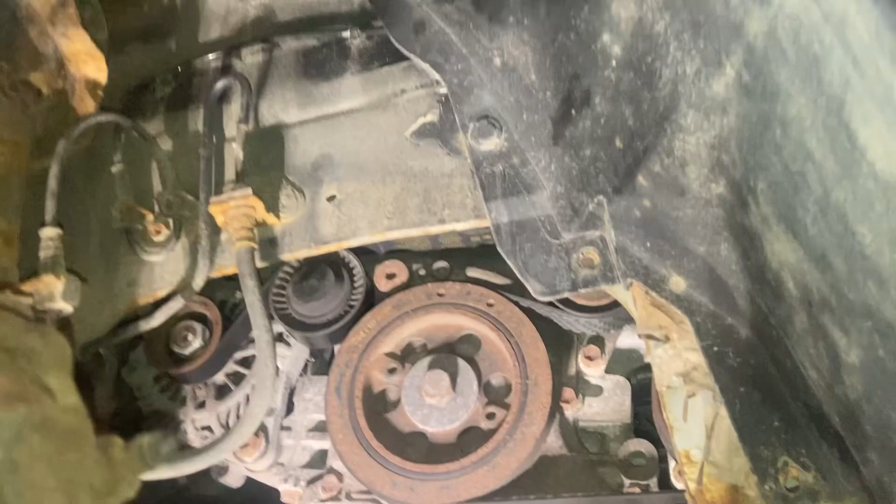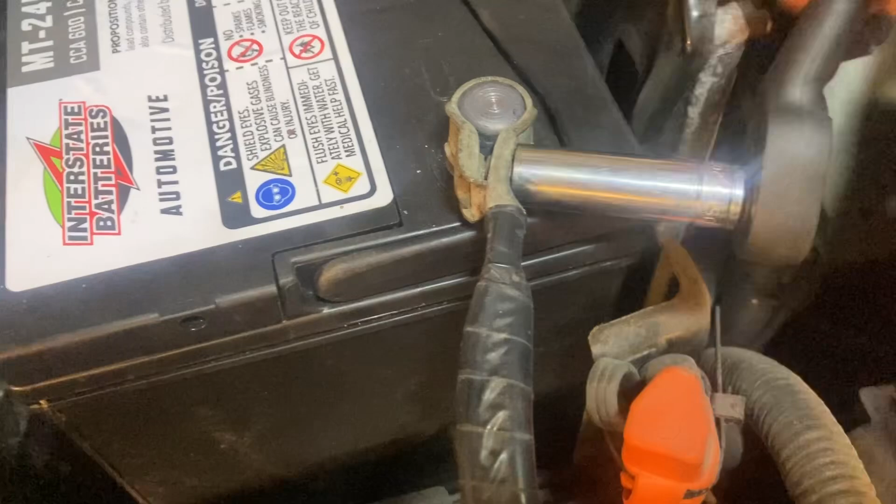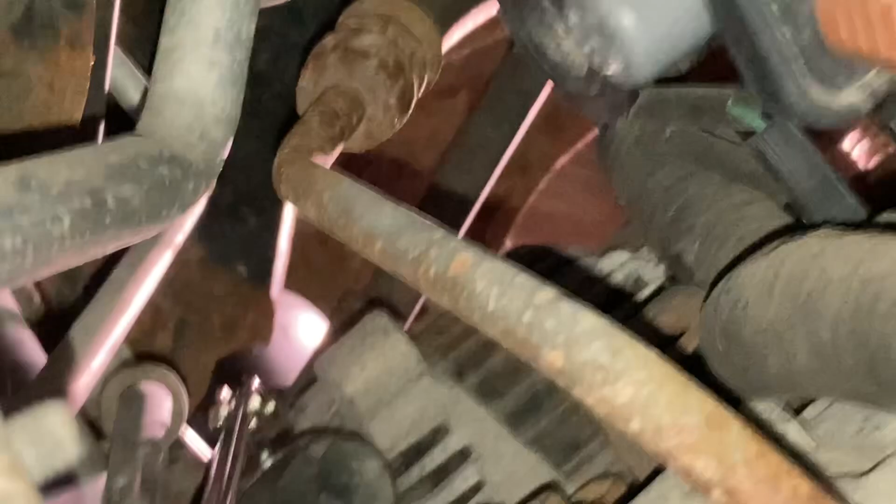I'm just trying to get a look at the mount bolts here, guys, because you can't really see them from the underside. I'm getting a look with my mirror here. I don't like the look of this. I don't know if you can see it too well. You see that bracket there? Let me zoom in a bit.

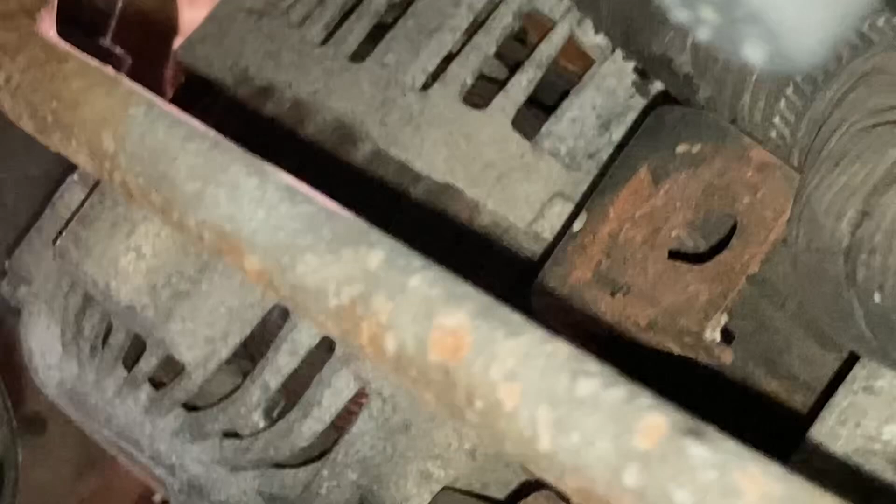Can you see the hole? Can you see how nothing is mounted in it? That's because the harness is pinched. Can you see that? Is that the root cause of the issue here? I doubt it somehow. That's not doing the system any favors, is it?

I mean, you can clearly see there's a tie wrap clamp that's supposed to go there, yeah? You don't need to be a genius to figure out that harness is not in the right position, do you? Oh man, see if I can get you a better shot of this, guys. Better lighting. If that's the kind of workmanship you're going to subject somebody's car to, leave it for somebody else. Not cool.

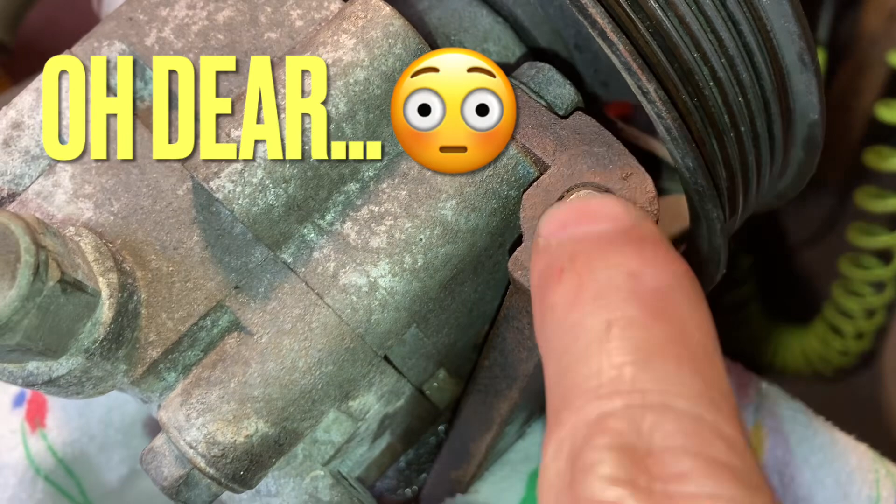God. Yeah, so you can see it's sheared. I've tried to weld a nut. I tried to drill it, but it's a fairly long bolt. I didn't want to drill it all the way through and tap it because I'm not going to be able to run true on the center line of the bolt. So I tried to extract it. I broke the extractor, and now there's a hardened extractor in here, so I'm hooped.

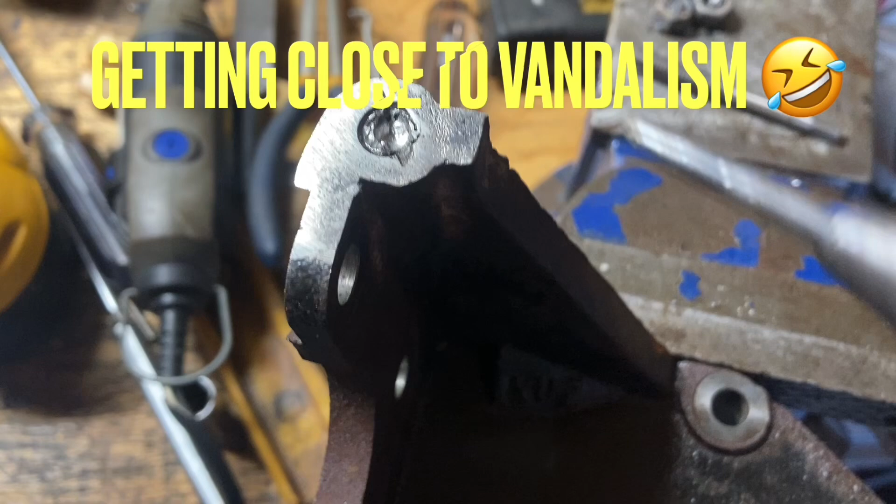I tried to cut a slot in it and use my manual impact, and yeah, as you can see, I was just starting to damage the bracket at that point, at which point I gave up. Fortunately, there's a fella with a machine shop in the neighborhood here, so I'm going to see him.

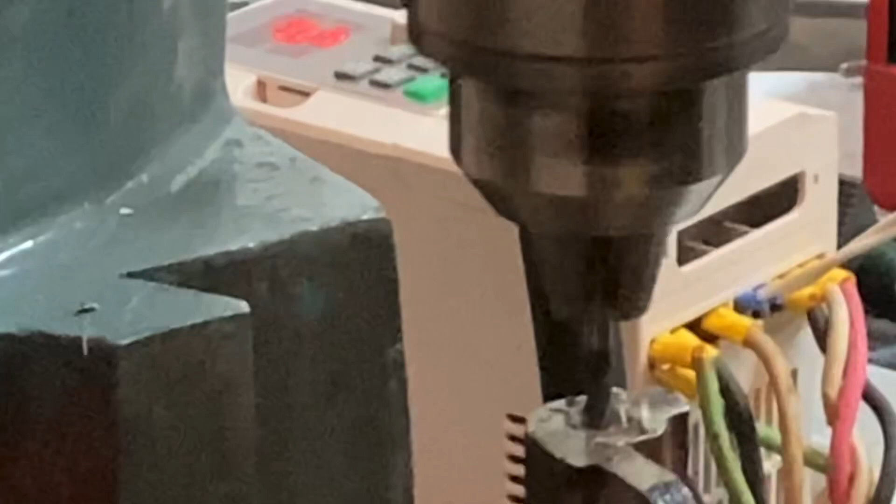The extractor is hardened steel, of course. You're not going to drill that out with regular drill bits. And yeah, so far so good. That is how it's done when you've got the skills and the tools.

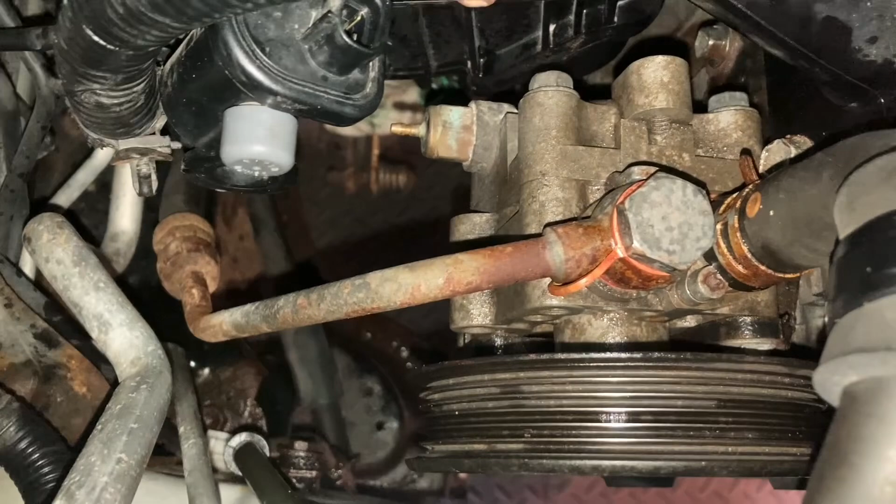Power steering pump is all back in. Yeah, that was a bit of work. I could have done without that aggravation, but what can you do? Nobody's fault but my own, I guess.

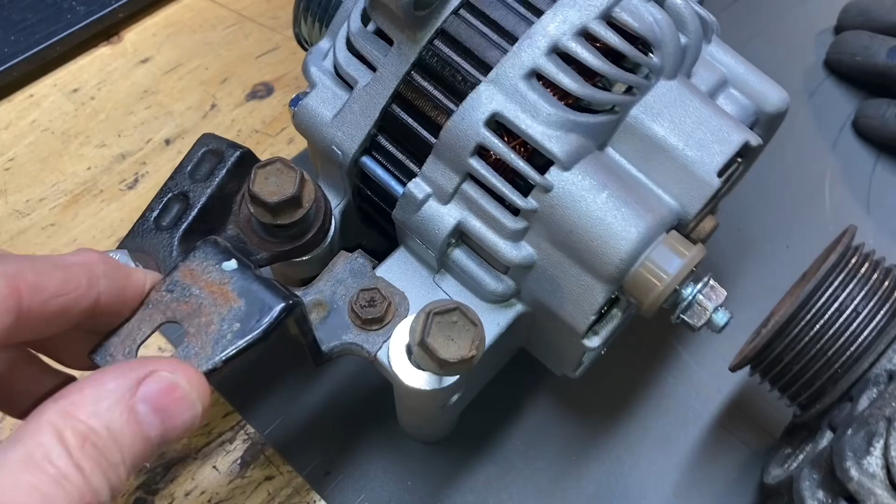So I've got the bracket swapped over. This is just a standoff for the wire loom, guys, of course the tie up to the power steering pump. New bolt.

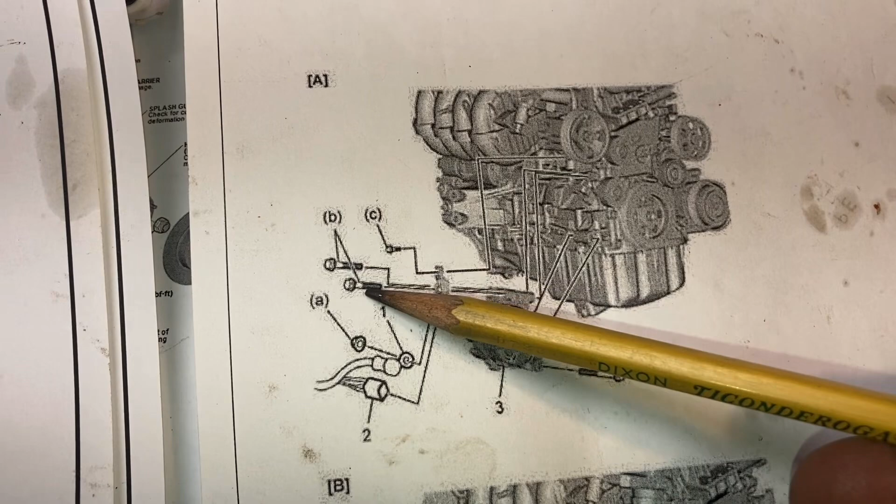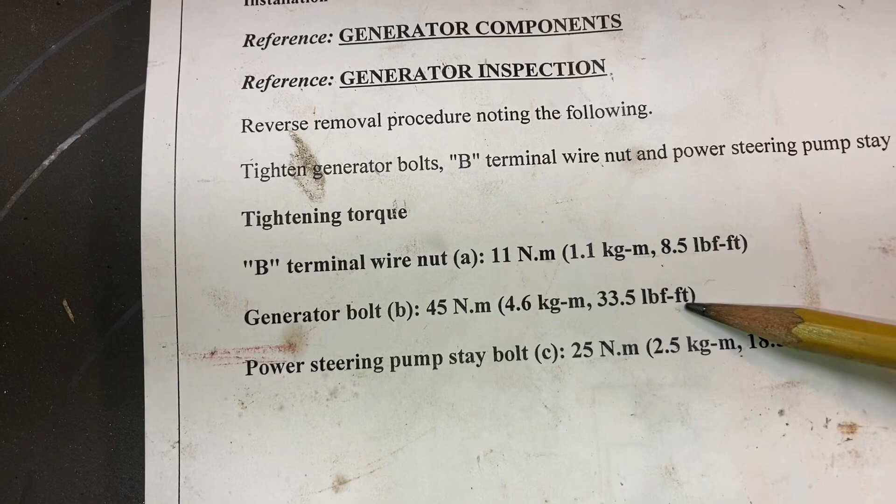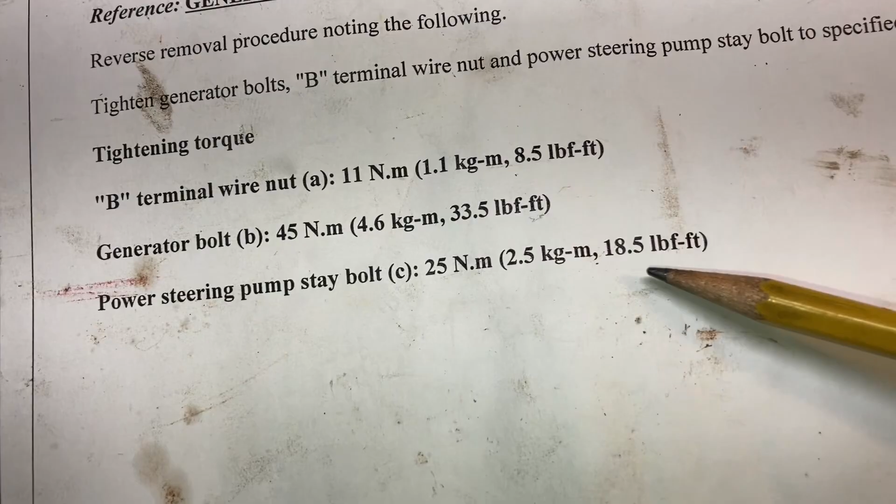So the 3 bolts, the 2 mid-length ones and the long one, torque spec on those, tighten them up to 33 and a half, that'd be 34 foot-pounds to you and me. And the stay bolt here, wee bugger, power steering pump stay bolt is 19 foot-pounds, the smaller one there.

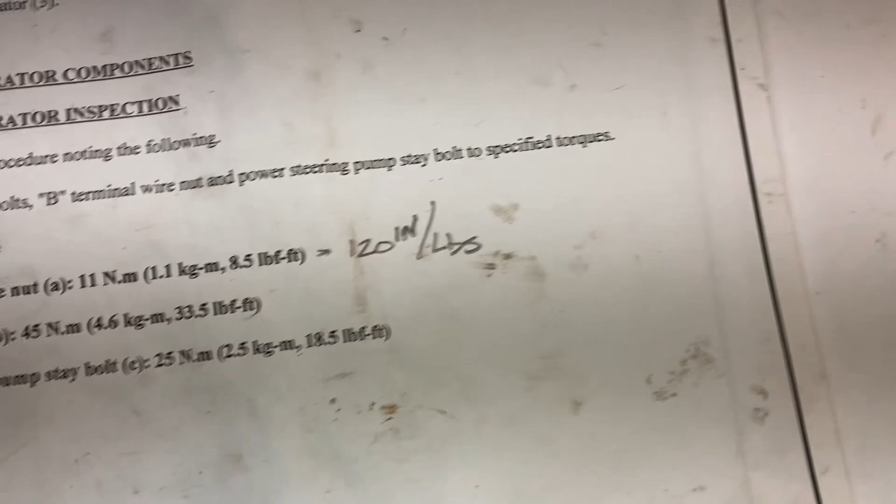Torque the nut on the stud, right? That's spec'd out at 8.5 foot-pounds. I don't know why they would put it in foot-pounds, because there's no way in hell you're going to get a wrench that size in. So go to your smaller torque wrench. That's 120 inch-pounds is what that is equivalent to.

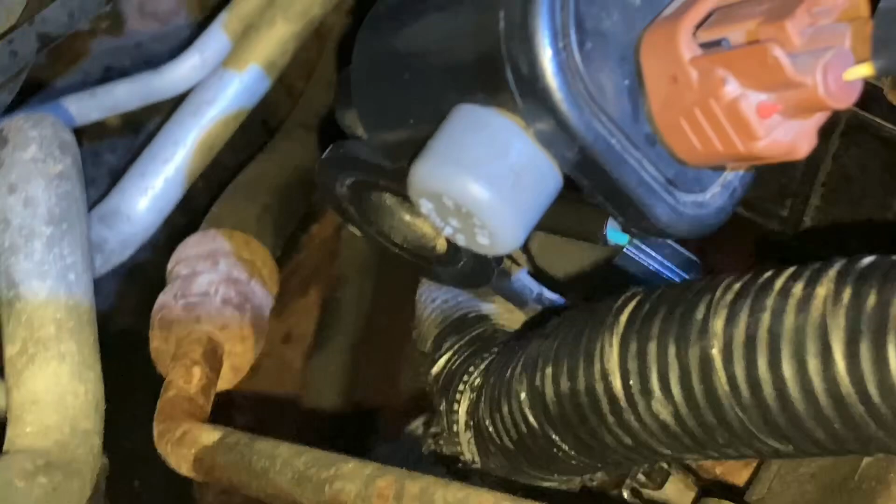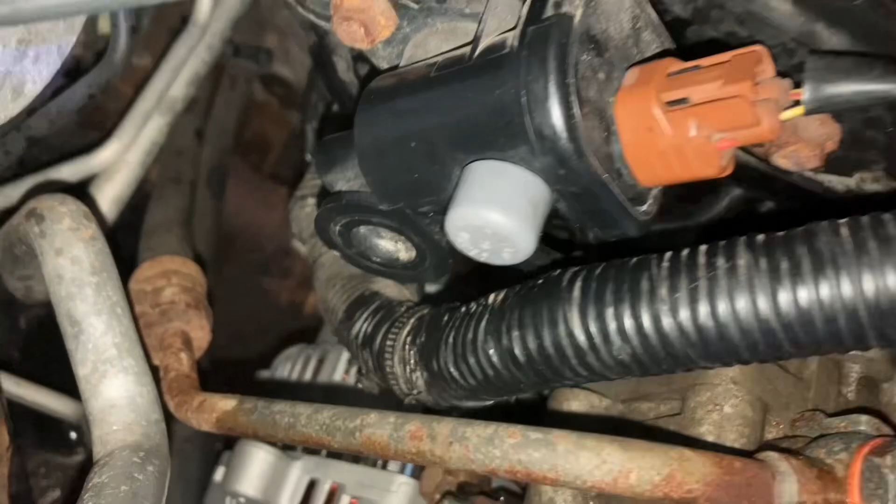Yeah, so the harness is all resecured. It's all in the proper standoffs there, guys. You can see the way it sits off the alternator there, not jammed in between. Yeah, the pressure switch on the power steering pump is back on. Not that you'd be dealing with that in a normal installation, but make sure all the tie wraps and standoffs are all clipped into the correct position. Obviously the lug is on the B post there, and I put the connector on the alternator as well, guys.

I guess I forgot to film that. I'm going to clean these ground lugs. That is the knock sensor, that is a ground lug, and that is a ground lug. I'm going to clean these while I'm here. It wouldn't be a bad idea to remove this, clean it up, guys. Again, we put a dielectric compound on it to keep it from corroding.

That's the body ground, the main body ground, and you see there in the back of the gearbox, that's actually the engine main ground. I've removed that and cleaned that as well. You can actually access it through the wheel well. It's right there.

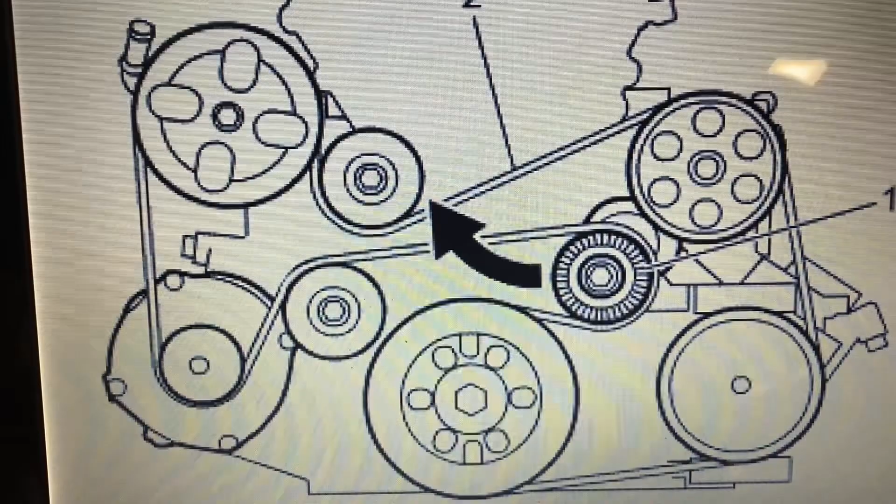Here's a look at the belt routing, guys, if you forgot how it goes, which is easily done. This is again for the J24B engine. The earlier pre-2010, 2009 and earlier SX4s have a J20A engine. This is only for the J24B, 2010 and later, 2.4-liter gasoline.

So I have plenty of work on this thing still, guys, as you can see. The drive shaft is now back in. In fact, the ball joint is just sitting there. It's not bolted. The pinch bolt is not attached.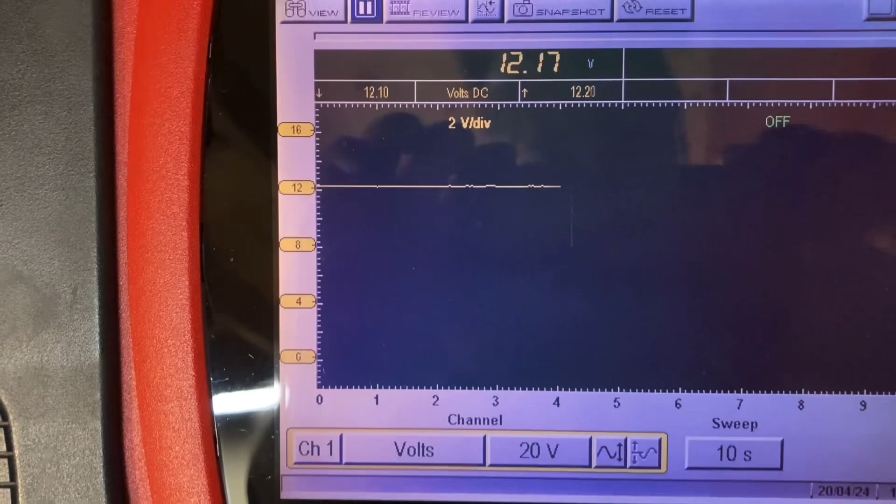Sorry about the rumble here, guys. This heat shield here is loose. Obviously, I've got 1,000,001 jobs I need to sort. That's very annoying, that noise.

Okay, so that voltage looks good. Voltage looks good there. If you remember, the trouble spot was around 2,500 RPM. Okay, so go to 2,500 RPM, Lisa.

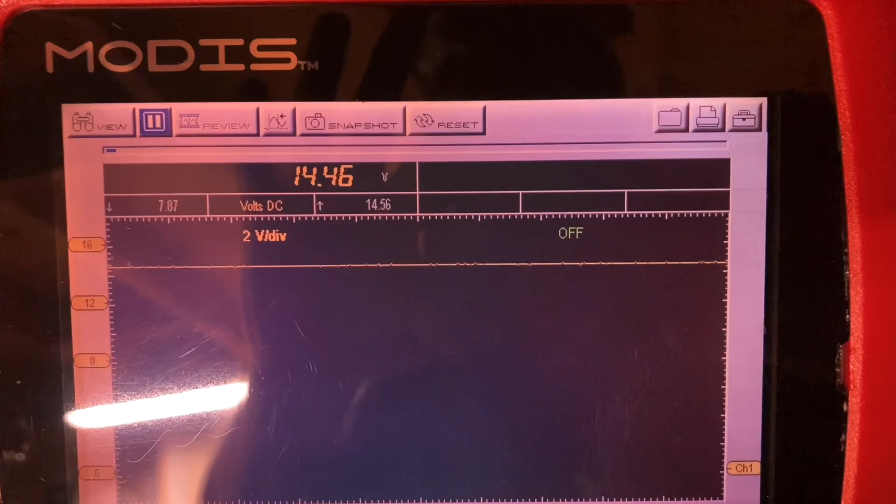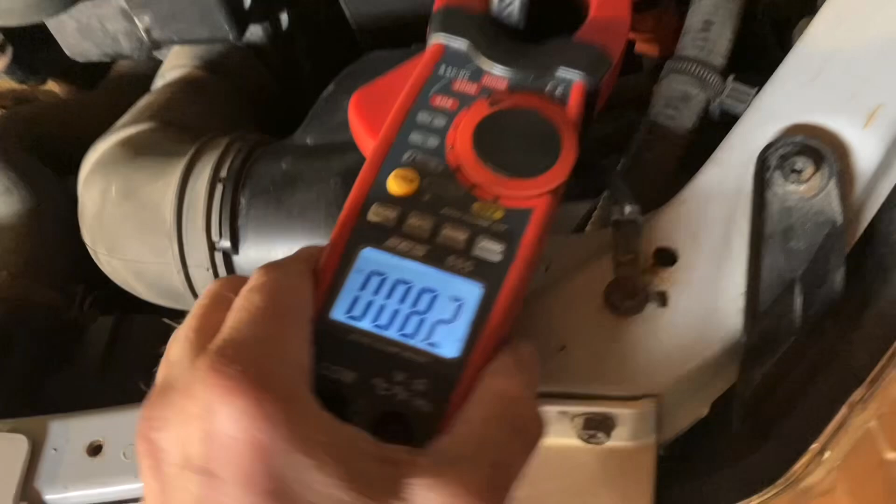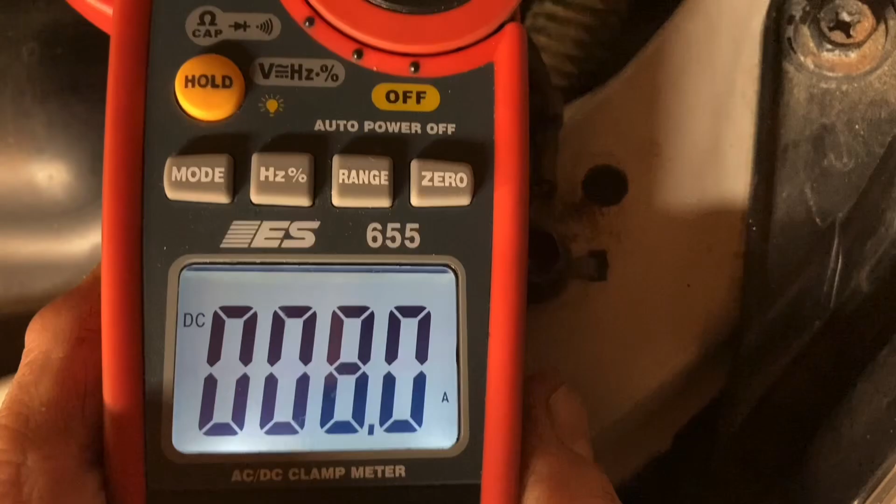Good. Back to idle. So the battery is charging at idle here. That's amps. At about 8 amps. And we're just sitting around here at about 14.4. That looks about perfect to me.

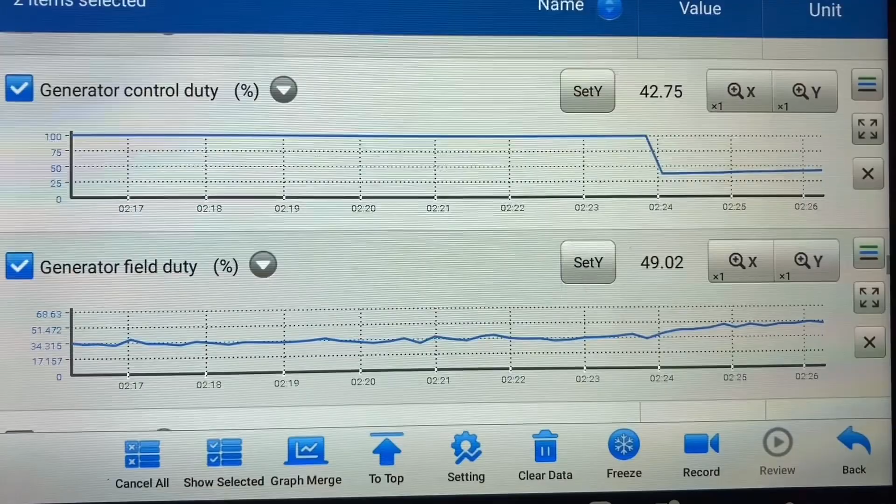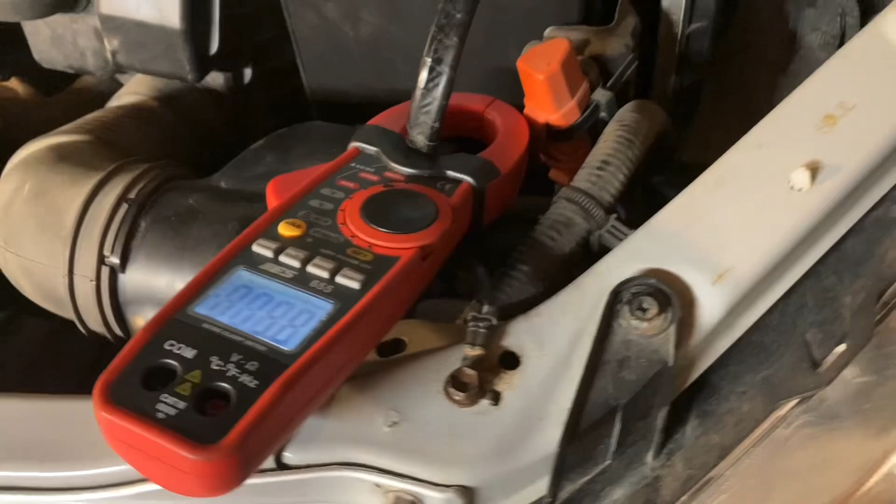I guess we'll call it good at that, guys. I'm pretty happy with this. I think everything is cool. I didn't see any scary 17-volt output for the alternator under any circumstance there, including the trouble spot RPM.

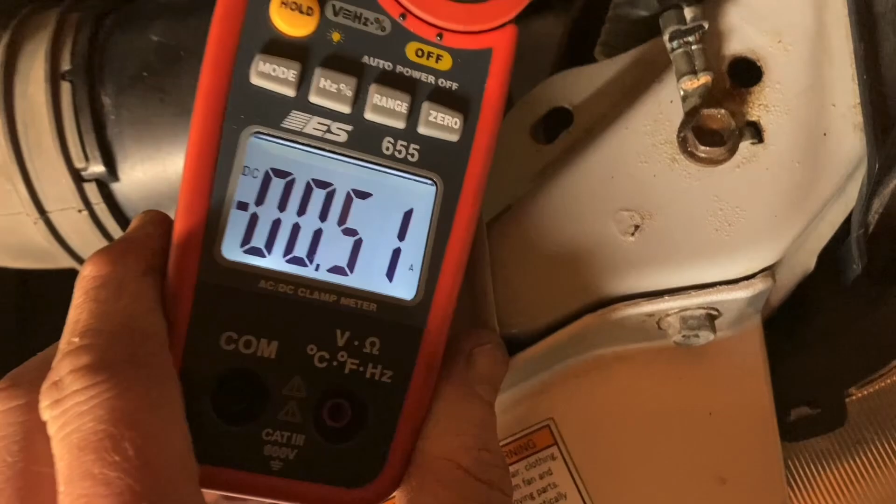And yeah, the current looks good. That's on the 400 amp scale. I probably should have went to the 40 amp scale. It would have been a little bit more accurate, I guess. Car's not asleep yet, of course, right? So yeah, that was good.

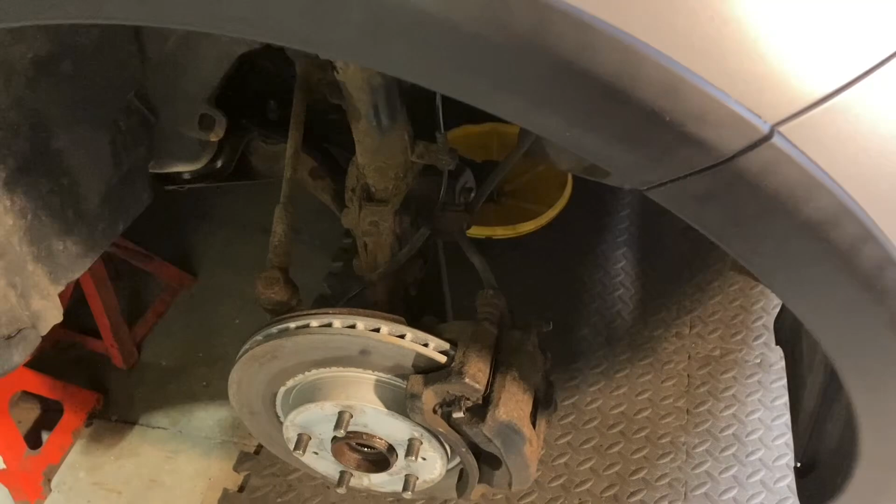I'll call that good. I've got lots of work to do on this car, guys. The control arms are gonna get changed. The ball joints are absolutely bitched. Look at the state of the tie rods there. They're knacked. I've got a lot of work on this car before it's gonna see the road, that's for damn sure.

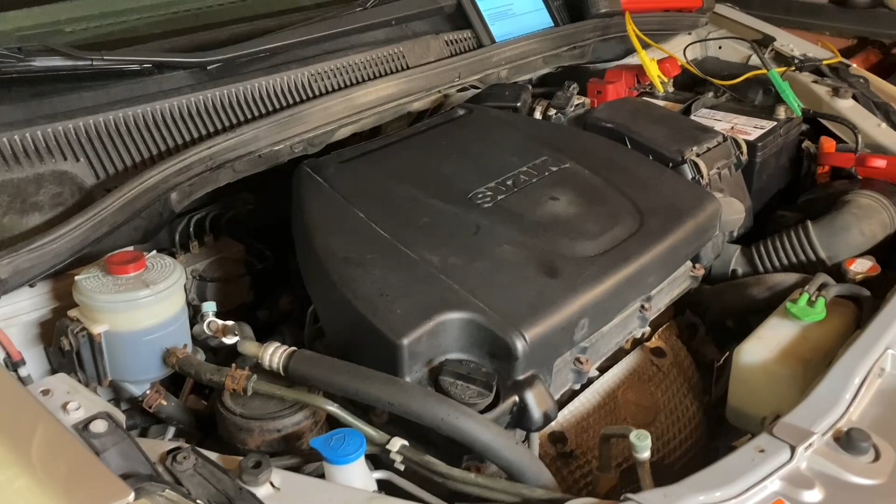I really should say thanks to my missus here, guys. She spent about 4 hours the other day steam cleaning the interior. It came up amazing. Great job.